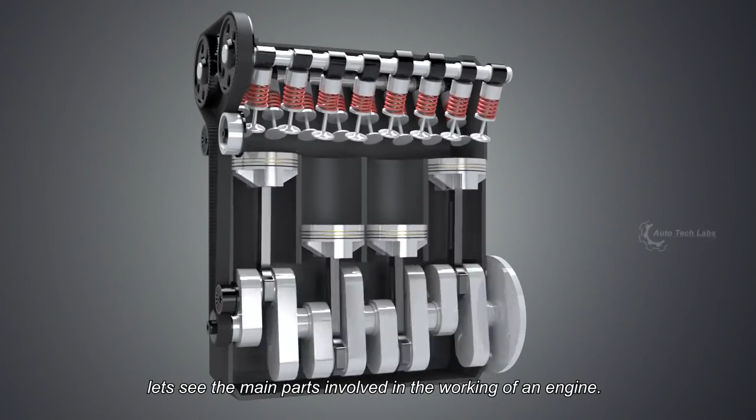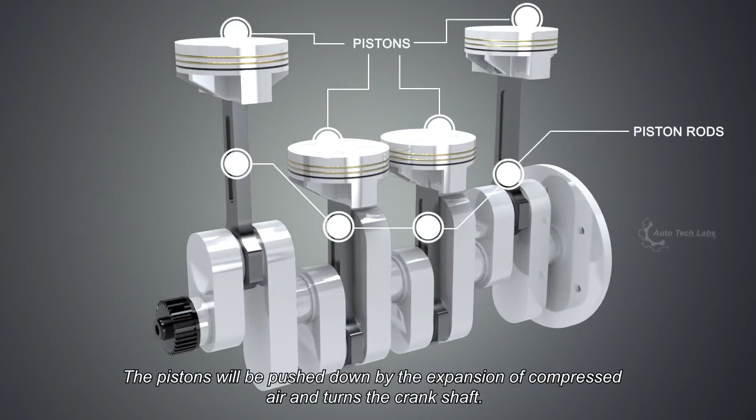First, the crankshaft. This is the part which converts the linear motion of the piston to a rotational force. Next, the pistons and the piston rods. The pistons will be pushed down by the expansion of compressed air, and turn the crankshaft. And the valves, which control the flow of air and fuel into the cylinders.

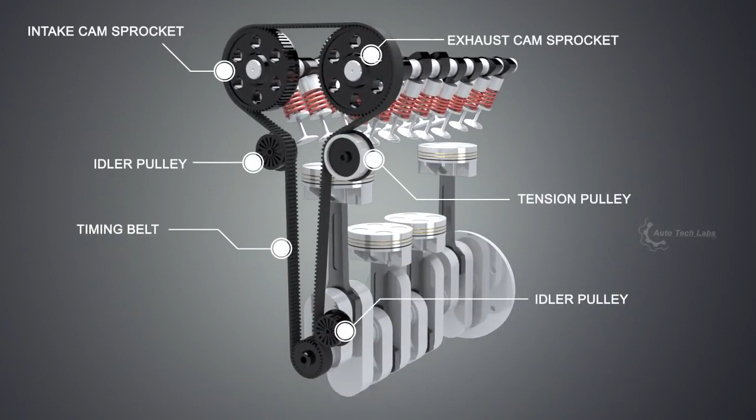These valves are driven by the intake camshaft and the exhaust camshaft, and the camshafts are driven by the crank itself, using a timing belt. There will be idler pulleys and a tensioner pulley to hold the belt tight in place.

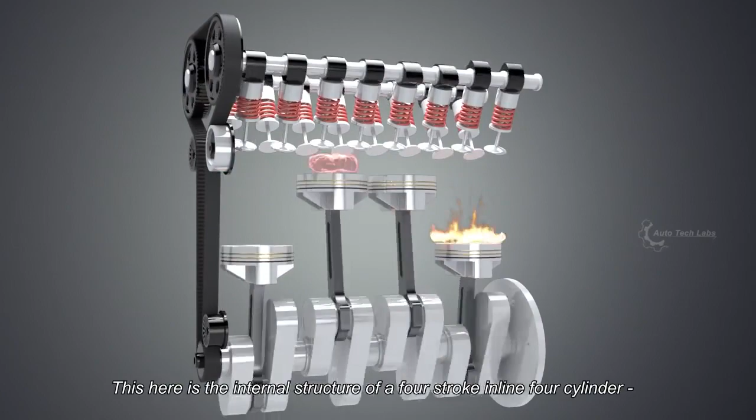This here is the internal structure of a 4-stroke, inline 4-cylinder, DOHC engine, which is commonly found in most hatchback and sedan cars. A 4-stroke engine should pass through 4 different strokes to complete one cycle to produce power. They are intake, compression, power, and exhaust stroke.

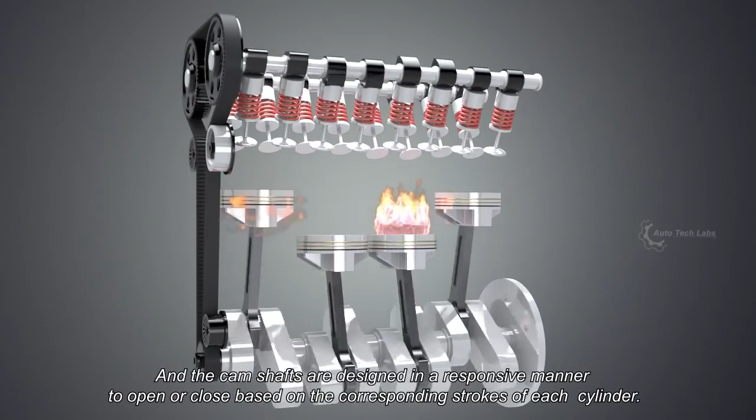The crank-to-camshaft ratio is 2:1, which means it will take 2 crank revolutions to complete 1 camshaft revolution. And the camshafts are designed in a responsive manner, to open or close based on the corresponding strokes of each cylinder. Let's take a look at a single cylinder, and see how a 4-stroke engine works in detail.

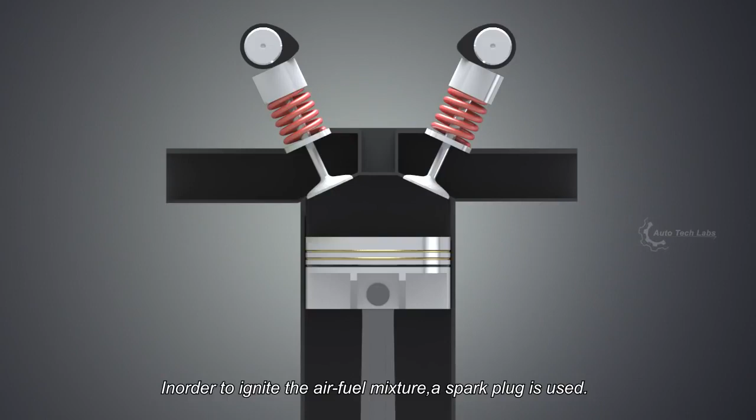In order to ignite the air-fuel mixture, a spark plug is used. This will ignite the compressed air-fuel mixture with the help of an electrical spark. We will take it down by each stroke.

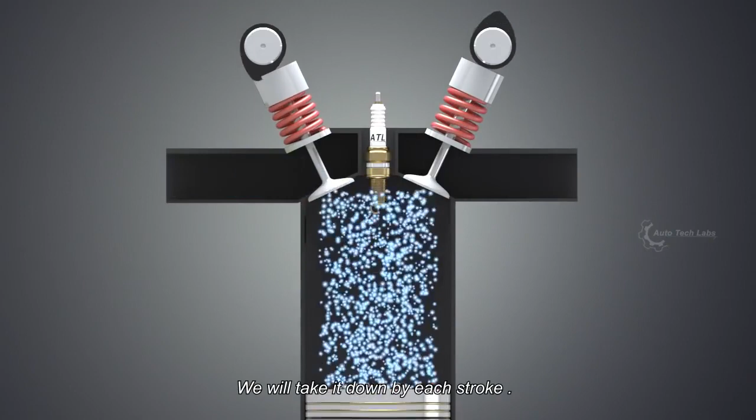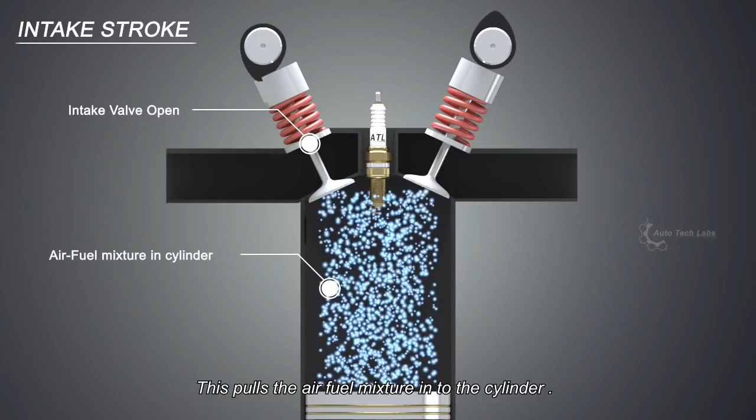The intake stroke. The inlet valve opens and the downward movement of the piston creates a suction. This pulls the air-fuel mixture into the cylinder. Once the air-fuel mixture is in the cylinder, the compression stroke begins, compressing the mixture. At this time both inlet and outlet valves stay closed.

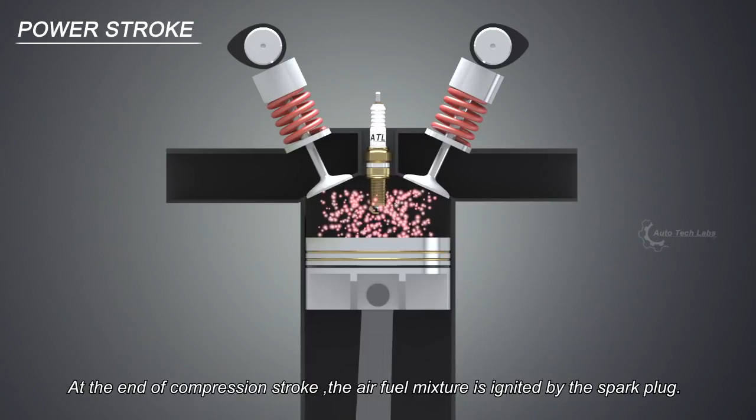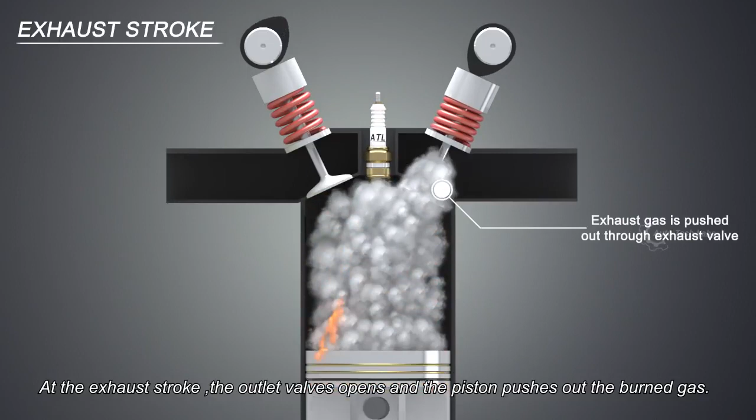At the end of the compression stroke, the air-fuel mixture is ignited by the spark plug. The explosion exerts pressure and pushes the piston down. This is the power stroke, which produces power to the crank. At the exhaust stroke, the outlet valve opens and the piston pushes out the burned gas. The cycle starts again from the intake stroke, keeping the engine running and producing power.

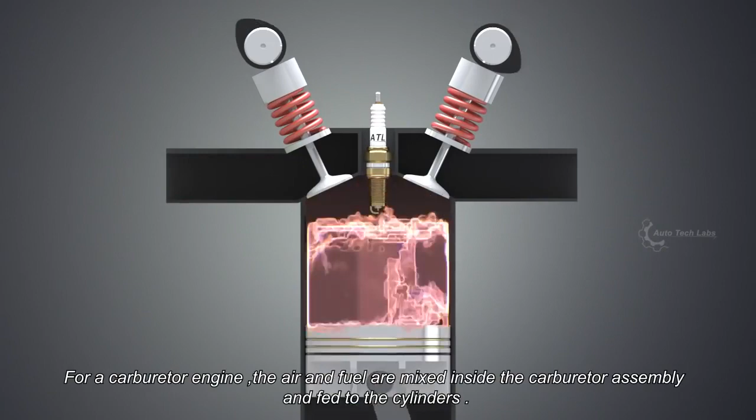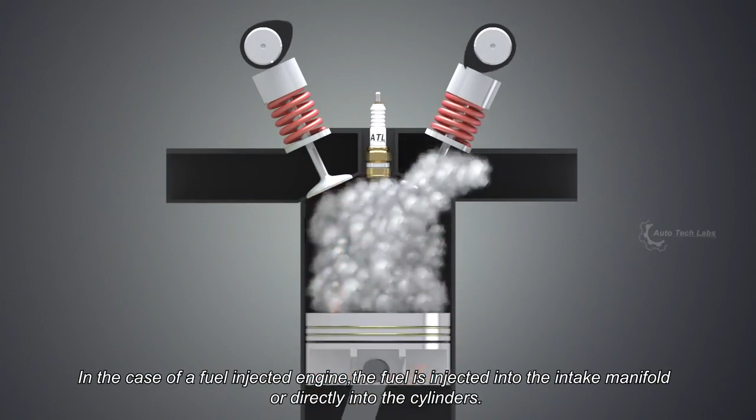For a carburetor engine, the air and fuel are mixed inside the carburetor assembly, and fed to the cylinders. In the case of a fuel-injected engine, the fuel is injected into the intake manifold, or directly into the cylinders.

Since only a power stroke produces power, you may wonder how the engine turns continuously. Well, the answer is in the crank itself. The flywheel and the crank counterweights provide momentum, which keeps the crankshaft from stopping immediately.

For a 4-cylinder engine, considering any time instance, one cylinder is always in power stroke, which produces more power and less vibrations compared to a single-cylinder engine. And that is how a car engine produces power in simple.